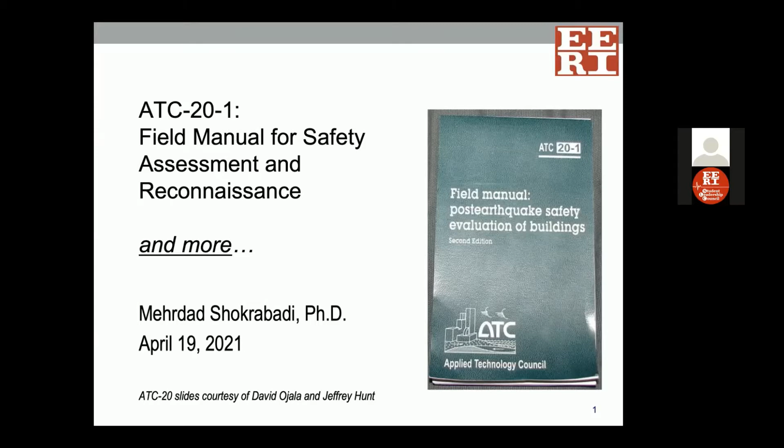A brief outline of my presentation today: first I'll go over safety assessment and reconnaissance after an earthquake. ATC 20 is mainly intended for the first one, safety assessment, so it's important to distinguish between these two. Then I'll go over some of ATC 20's concepts and its guidelines for inspection of different types of structures, and ultimately some tips for doing a successful field inspection.

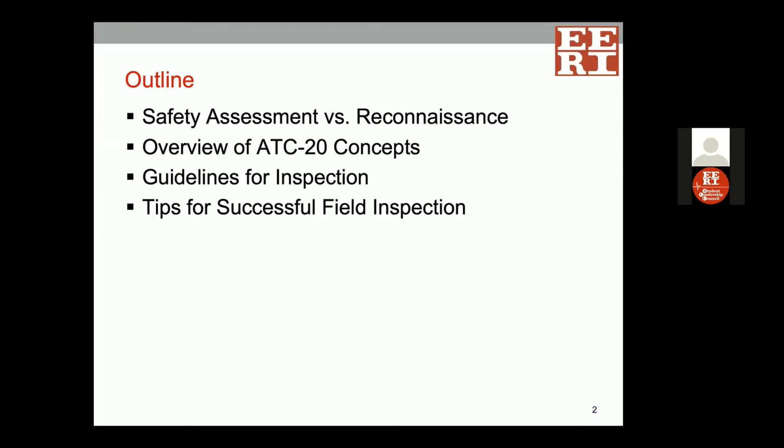Before I start going over the ATC 20 concepts, it's good to get a better idea of the intentions behind its development and what it can or cannot be used for. ATC 20 is a document developed mainly for the safety assessment of various types of structures after an earthquake. It is not intended for earthquake reconnaissance, although many of these guidelines are applicable to both.

To distinguish between safety assessment and reconnaissance: the goal of earthquake safety assessment is to as rapidly as possible identify unsafe buildings that put the lives of their occupants into danger, and make sure occupants of safe buildings can go back to them. On the other hand, the objectives of reconnaissance are broader and more long-term. The goal is to document the seismic performance of buildings in as much detail as possible - both components that worked and those that failed to meet their design objectives - and use the findings to propose revisions to current design codes and practices, or come up with future research ideas.

To explain further, when doing earthquake safety assessment, all you need to do is tell building owners whether their building is safe to return to, or whether they need to evacuate within the short amount of time you have after an earthquake. Whereas with earthquake reconnaissance, you have more time to thoroughly detect what happened to buildings during an earthquake and what lessons can be learned from their performance.

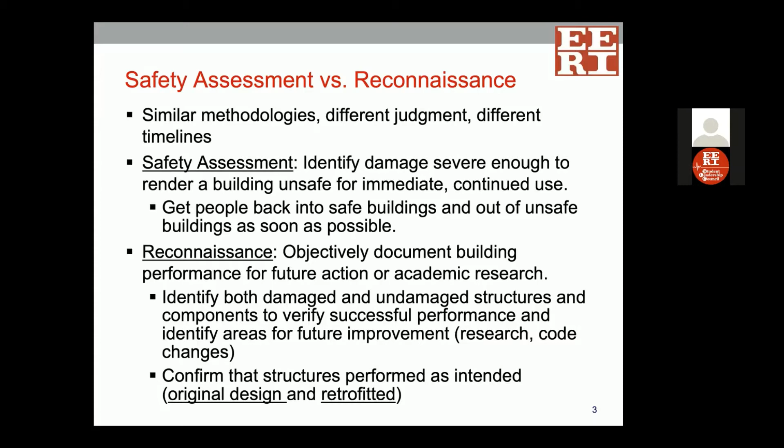The goals of reconnaissance are broader and more long-term compared to earthquake safety assessment. If you're doing reconnaissance, your goals should be purely objective - you're concerned with documenting what went wrong in a building and what seismic details worked as intended by the developers. These goals could either come from the company or institution that sends you into a region for reconnaissance, or if you're self-deployed, you should set your own goals and try to stick to them as much as possible.

There is also a safety assessment component to each reconnaissance. You have to make sure that if you're about to enter a building, that building is safe and that you're allowed to enter it. Also, if you're doing some sort of resiliency assessment for a community, you have to probably document whether a building remains safe after an earthquake or not.

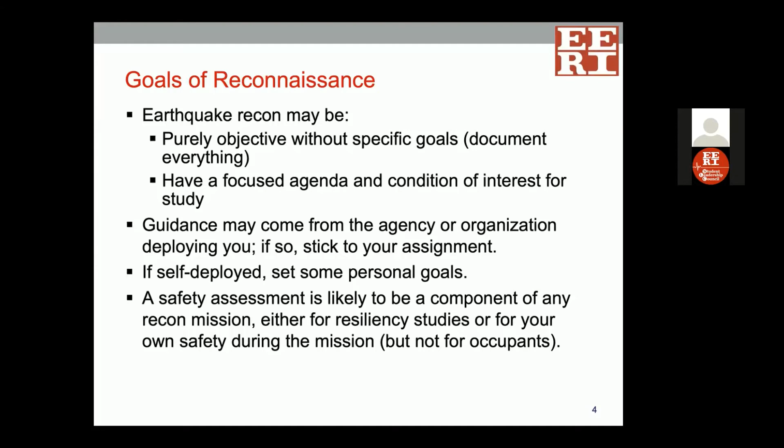So why is ATC 20 not ideal for reconnaissance? As I mentioned, reconnaissance is a purely objective task where you minimize the involvement of your own judgment in the procedure. Whereas earthquake safety assessment is subjective in nature - you observe the conditions of the building and then decide whether it's safe or not based on your judgment. Also, safety assessment is mostly concerned about what went wrong with the building, whereas in reconnaissance you document both what components worked and what components failed to meet the design objectives.

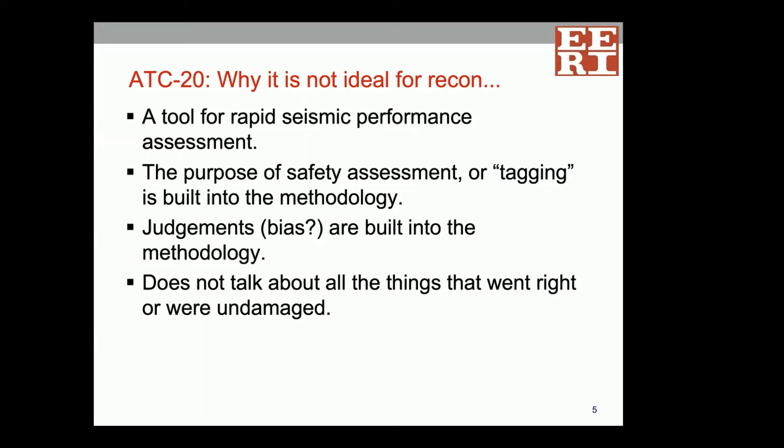So despite all of this, there's still some stuff in ATC20 applicable to both reconnaissance and safety assessment. Chapters 5 to 10 of ATC20 list in detail, for various types of structural systems, the components of buildings that are most vulnerable to an earthquake. So even if you're doing reconnaissance, you can still use this as a guideline on where to start your inspection and what kind of components to look for damage in.

It's also important to note that not all the safety hazards in a building are due to what goes wrong with the structural system. Non-structural components could also pose a great danger to the building's occupants. Imagine a fractured gas pipe, a gypsum wall about to collapse, or a hanging architectural component on the exterior that could fall off at any minute. These non-structural components could pose as much danger to the lives of building occupants and passersby as the structural elements. So we need to consider them, and ATC20 actually encourages its users to consider this kind of stuff as well.

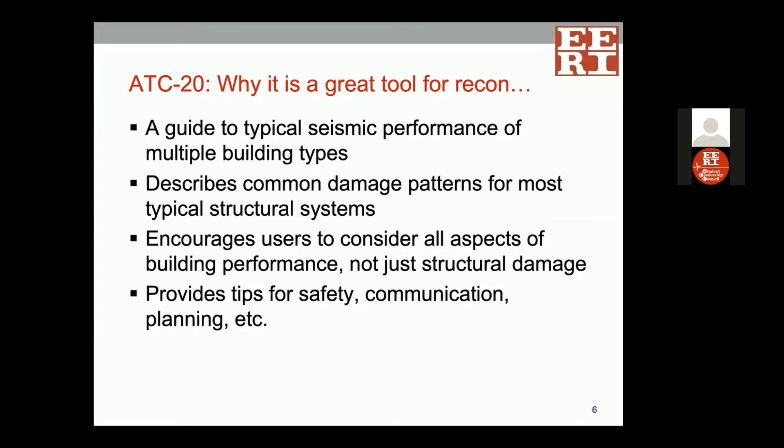Now a little bit more about ATC20's concept - first, its evaluation process. The ATC20 safety evaluation procedure has three main steps: a rapid evaluation, a detailed evaluation, and an engineering evaluation. Many buildings would only see the first two. I'd say about 95% of buildings would only see a rapid evaluation, probably 3 to 4% a detailed evaluation, and very few buildings get the engineering evaluation.

The first type, rapid evaluation, is as its name suggests - a very fast and quick evaluation usually done within hours after an earthquake, taking only 10 to 30 minutes. It can be done by anybody - building inspectors, disaster workers, or a qualified structural engineer. The goal is to identify buildings that are clearly unsafe and post a red tag, or buildings that need further evaluation and post a yellow tag. Other buildings are posted with a green tag, letting occupants go back inside. For buildings posted with a yellow mark in the rapid evaluation, a more detailed evaluation can be done.

This detailed evaluation is done by qualified structural engineers, usually taking 1 to 4 hours, and is more detailed and involved compared to a rapid evaluation. The last type, an engineering evaluation, isn't actually addressed in ATC20, but is something owners concerned about their building's safety can pursue. They would hire their own engineer, who would evaluate the building's safety over a span of days to weeks.

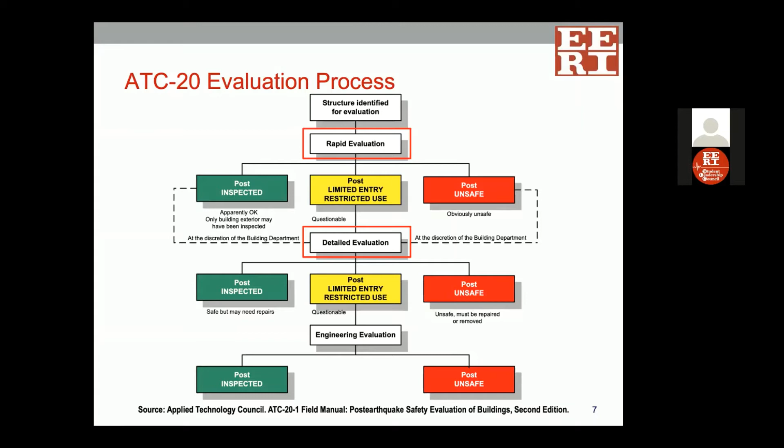As mentioned in the last slide, a building can be posted with 3 different types of placards. The first, the green tag, tells occupants they can safely return to their building and there are no major safety concerns.

The second, a yellow tag, tells owners there are some concerns with the safety of the entire building or some portions of it. Depending on the situation, either the owner can return but must avoid certain marked areas, or they can only return for a very short period to retrieve personal belongings.

Ultimately, the unsafe or red tag means it's unsafe for occupants to go back to the building before the damages are addressed.

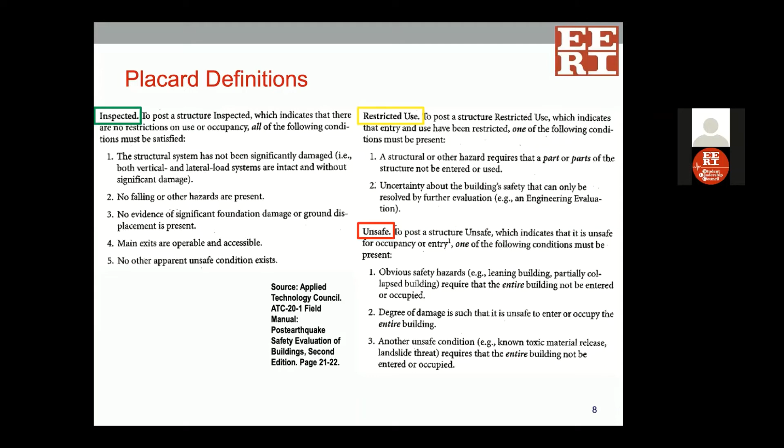So the first type of evaluation, rapid evaluation, as I mentioned before, was mostly done in the field, and it is what we are doing today as part of our exercise. So I would go over the details of this type of evaluation a little bit more.

This is a type of evaluation that's done in a very short amount of time, usually between 10 to 30 minutes, and can be done by anybody — by you as a qualified structural engineer, or by a building inspector or disaster worker. I would say this is the type of evaluation you would do from the window of your car, by only looking at the exterior of the building for the most part.

So the main goal here is to rapidly identify the buildings that are clearly unsafe, or the buildings that you cannot decide whether they are safe or unsafe, and then pass them for further evaluation down the road.

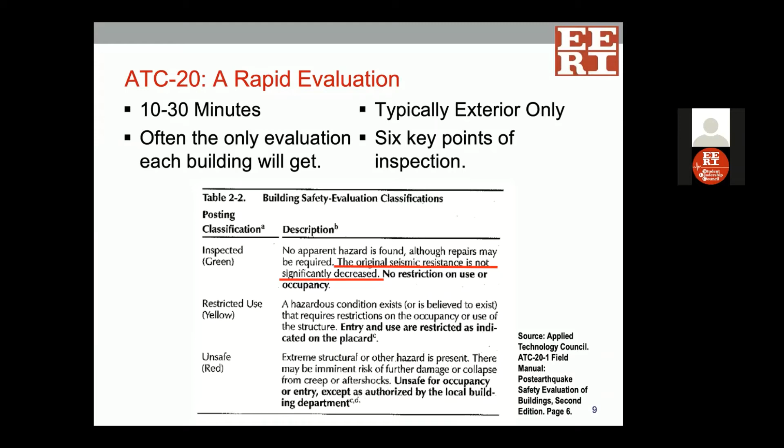If you see a building that has partially or completely collapsed, or has moved out of its foundation, or a building with a story that's leaning and out of plumb, or a building with obvious damage to structural components, or massive failures in the ground, then that building is unsafe and needs to be either repaired or demolished.

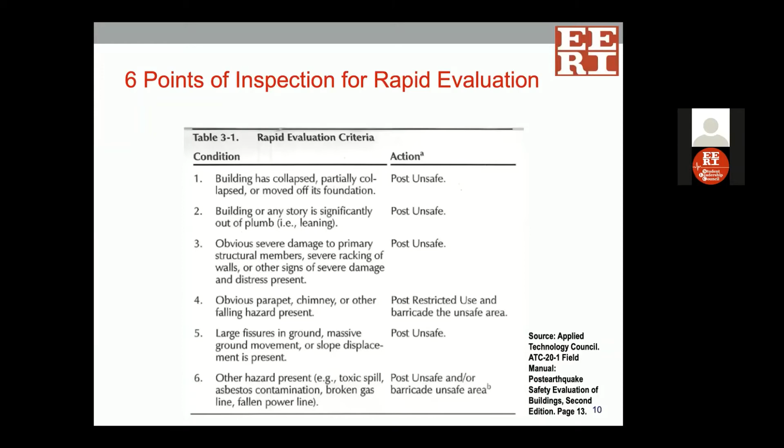For other things, like a collapsed chimney, or a non-structural hazard like the possibility of a toxic spill or a broken gas pipe, then it's left up to you to decide whether you want to post that building as unsafe, or just barricade the unsafe area and let the owners return to the building and use the remaining parts.

The second type of evaluation is the detailed evaluation. This is something done only by qualified engineers who have more time on their hands. It's a type of evaluation that usually takes between 1 to 4 hours and is a lot more involved and complicated compared to the rapid evaluation.

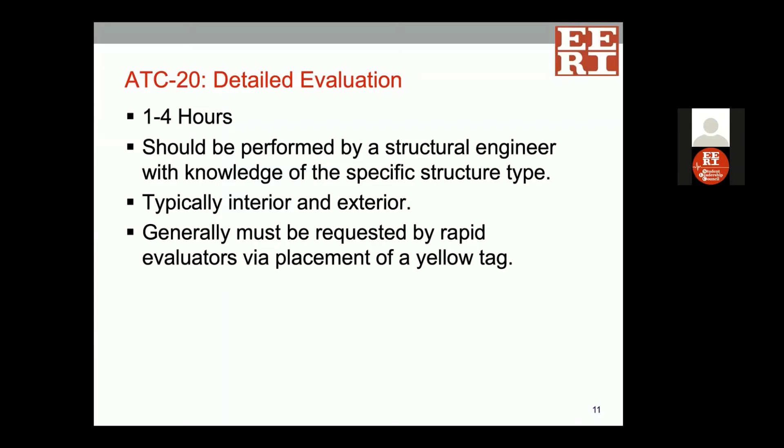Now let's take a look at some of the things we should be on the lookout for when we go for an inspection in the field. There are a few known plan and vertical configurations that are known to cause problems in earthquakes.

Buildings with setbacks have significant changes in their mass and stiffness along their height, and this kind of change could result in concentration of forces at the locations where the change happened.

Similarly, if you see a building with a rooftop tank, because the dynamic characteristics of the rooftop tank are completely different from the dynamic characteristics of the building, this could result in concentration of forces at the structural elements that support the roof tank, damaging them.

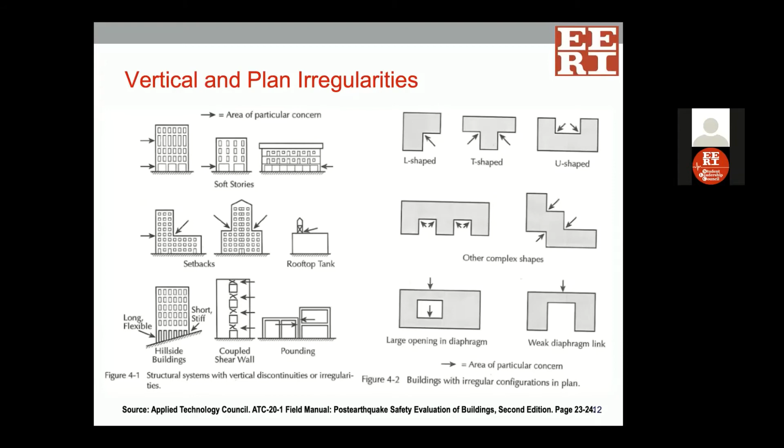As far as plan irregularities go, anything in the plan of the building that's not a simple geometric shape should be a source of concern because of the potential for concentration of forces. Also, if you see a building with a large opening in plan, you should be on high alert, because there's usually a concentration of forces in the elements that link the two portions of the slab adjacent to the opening, which could cause damage in those connecting elements.

Chapters 5 to 9 of ATC 20 list the most common structural systems with handy sketches that mark the areas of the building that could be the most problematic. Each chapter is focused on a specific structural system, and you'll also see a table in each chapter listing the most common failure types for each building and what kind of tag you should post if you see that type of failure.

Chapter 5 is about wood frame buildings. Basically, wood frame buildings would generally perform well in an earthquake. The most common issues in this type of building are separation of the chimney, problems with the foundation, and the cripple wall that connects the building to the foundation if there is a raised floor system.

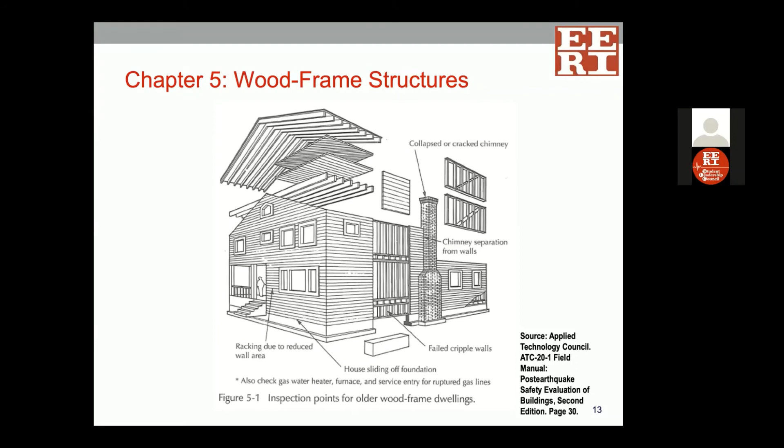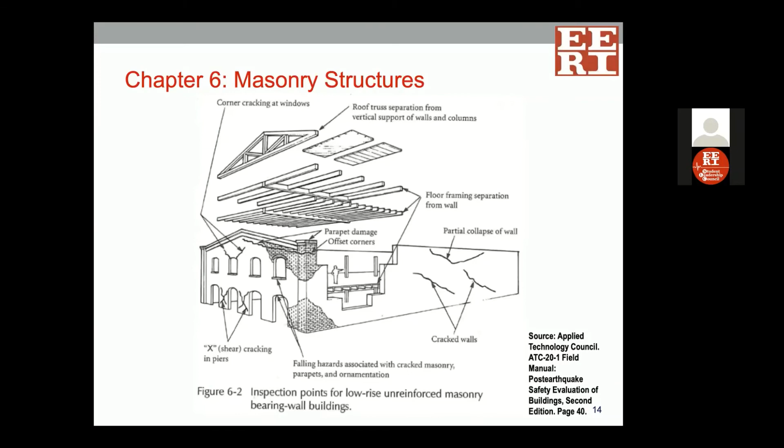Masonry buildings, especially unreinforced ones, are a common construction type in older buildings or less developed areas, and in past earthquakes they've been a major source of disaster. These buildings have very heavy and fragile walls that could easily collapse even under moderate ground shaking. Also, in many of these buildings, the walls and floors are built separately and then later connected together, so in many earthquakes they would separate and the entire building would collapse.

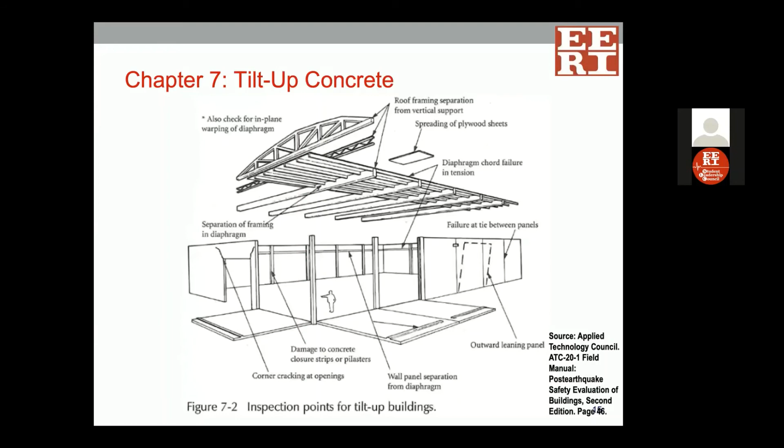Tilt-up construction is a type of construction that involves lifting or tilting precast concrete panels to form the walls of the building. Since the floor and wall are built separately, there is a potential for separation at the joints between the wall and floor, and you should closely inspect these joints if you are inspecting a precast tilt-up concrete structure.

Chapter 8 is about reinforced concrete structures. In concrete shear walls, the primary source of concern is damage between or at the corners of the openings. Also, the majority of the forces are developed at the base of the wall, so you should closely inspect the base of the wall for damage to the concrete, and if the reinforcement is exposed, be on the lookout for damage to the reinforcement.

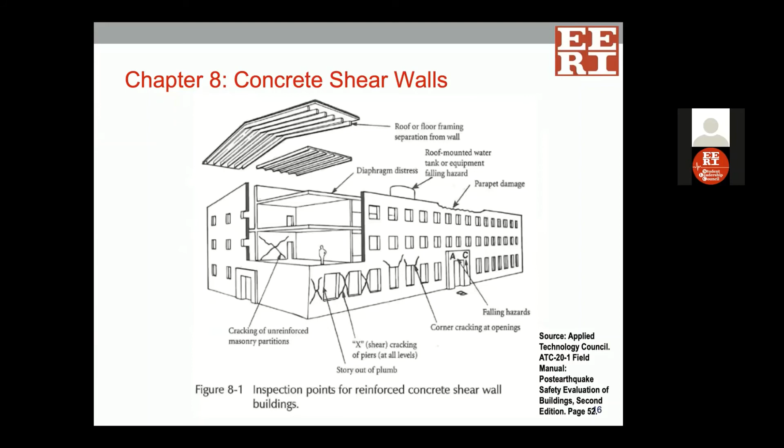If you are inspecting a concrete frame building, you should look for damage at the joints between beams and columns, at the columns, or at the base of the columns at the first story, since the majority of the forces are developed at this location.

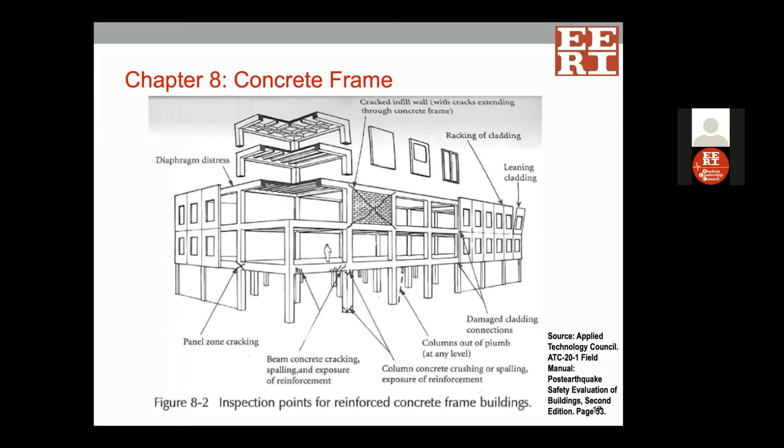Chapter 9 is about steel frame buildings. Steel frame buildings usually perform well during an earthquake, but past earthquakes have shown some vulnerabilities. The major source of concern in this type of building is the connection between the beams and columns, or beam-columns and braces.

Also, since these buildings are usually soft and have relatively small stiffness, it's likely that you would see large and significant residual drifts in them that would make the story look out of plumb.

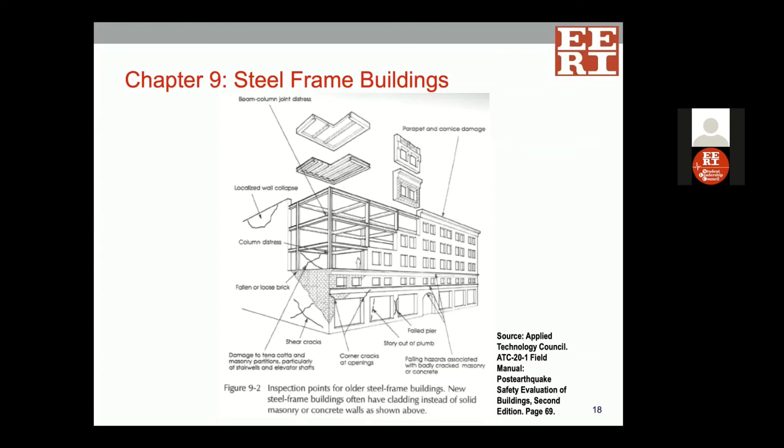There are some other chapters in ATC 20 as well. Chapter 10 is about mobile homes. In this type of construction, the most concern is at the connection between the home and the foundation.

Chapter 11 is about geotechnical hazards - things like ground failure, liquefaction, and any type of hazard posed to the structure by failures in the ground. This is something that needs to be closely examined by a professional geotechnical engineer.

Chapter 12 is about non-structural hazards. As I mentioned before, it's not just the structural members that could pose a danger to the lives of the building's occupants - things that are non-structural could also pose significant danger. Things like a broken gas pipe, a falling hazard, or things like that, and you should be on high alert for this kind of stuff as well.

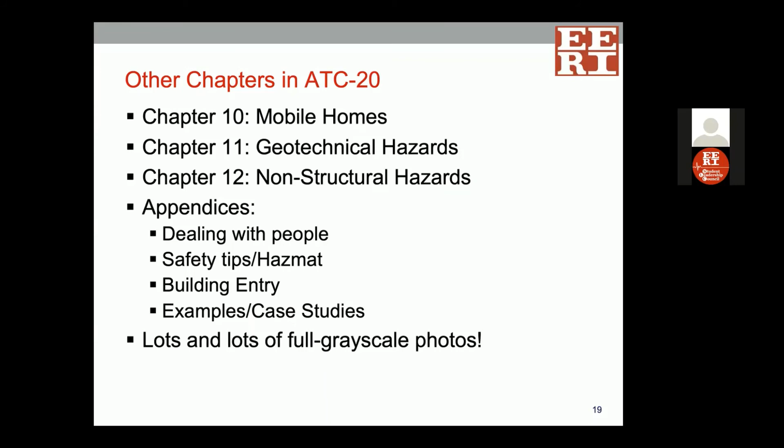There are some appendices to ATC 20 as well, which have guidelines on how you would deal with people, homeowners, and authorities; a chapter on safety tips you have to follow when you go to the field; a chapter on what kind of permission you need to enter a building; and finally a lot of examples and case studies with full grayscale photos from buildings that have sustained some sort of damage during past earthquakes.

So my last few slides are about the steps that you have to take to be able to do a successful field inspection. So basically, the first step is to prepare as much as possible. Have your own field manual with you, print out the forms that you need, and download all the apps that can help you in data collection.

Look at the Google Earth photos, and get an idea of how the region looked like before the earthquake happened. You should also get an idea of how intense the earthquake was by looking at the recordings of PGA and intensities at the station close to the location.

Also get an idea of how the buildings in that region look like and what type of a structural system they use. So check news reports and social media for any kind of reports on the extent of the damage in the region. And also, if you know anybody in the region, reach out to them to get as much information as possible.

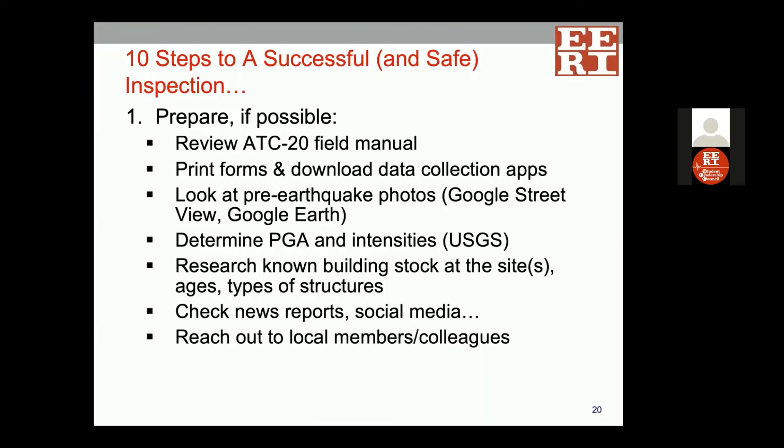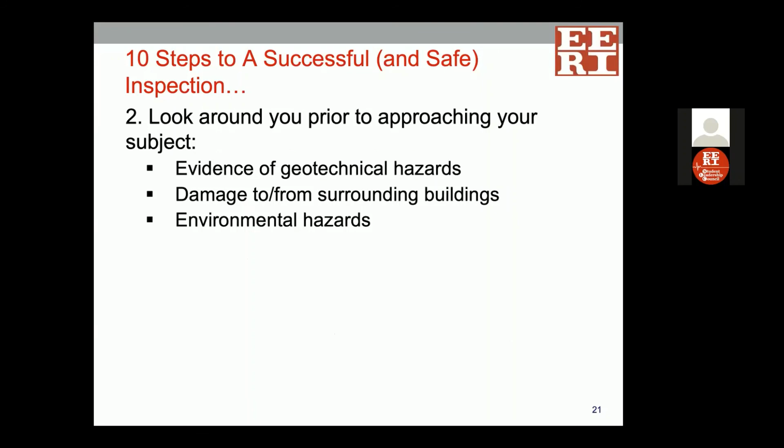So when you go to the field, before you approach a structure, you should look around to make sure that there are no major safety concerns to you and your life before you enter the building. Also be on the lookout for any kind of non-structural hazard, broken gas pipe, or any kind of falling hazard, which could result in serious injury or even death if you are not careful.

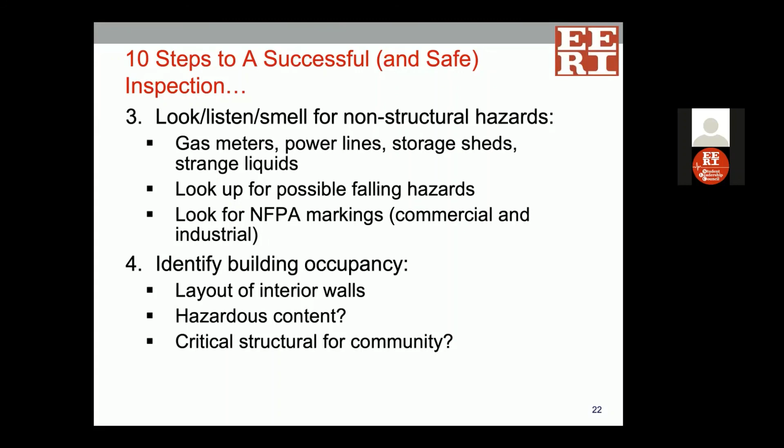So when you are entering a building, try to get an idea of the interior layout of the building and also what kind of occupancy it has. Is it like a main infrastructure building that is very much needed after an earthquake, or is it just a simple residential building?

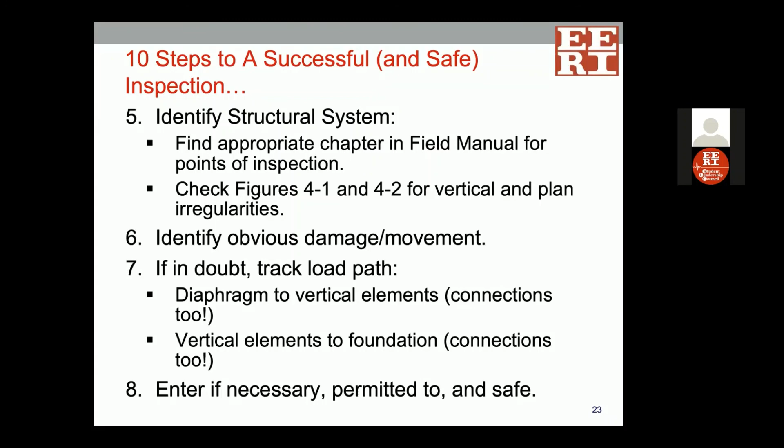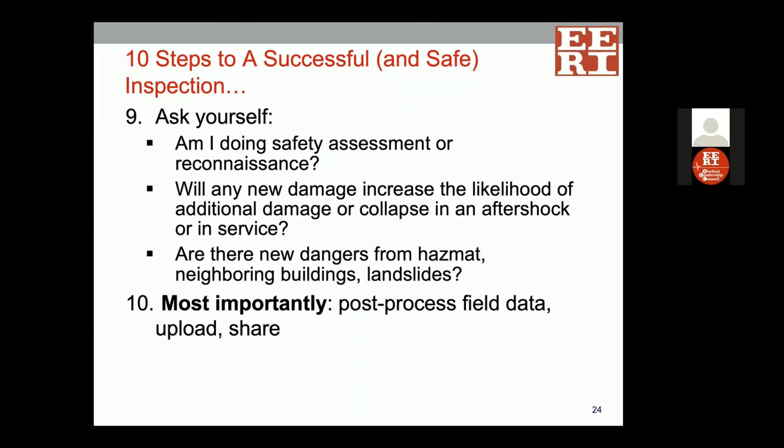You should always take a closer look around yourself before you enter a building. Just make sure that there is nothing that would jeopardize your life. And each earthquake is different. Just because you've been to many inspections before doesn't mean that everything is going to look the same in the current inspection. Always be aware of what's around you, and ultimately it's you that is mostly responsible for your own life and the life of others.